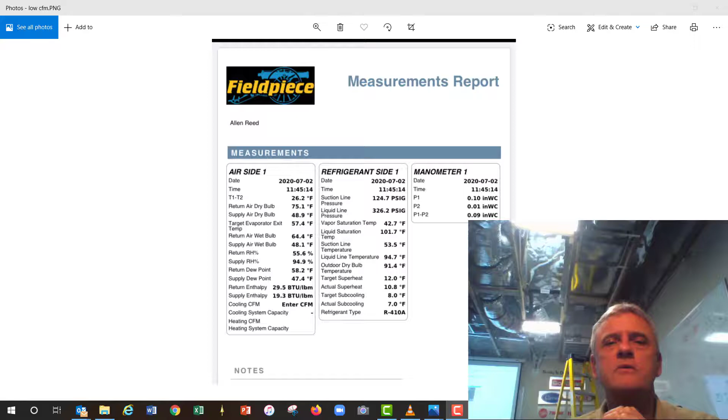Hello. Had a sort of a troubleshooting ponder for y'all.

We regularly talk about the effects of airflow on being able to check superheat and subcooling on a system. And on that theme, came up with a subject for discussion, and that is profiles.

Many of the variable speed systems have ramping profiles for the blowers. I'm going to cover a few of those in just a moment and show you a few pictures of those to see what I mean.

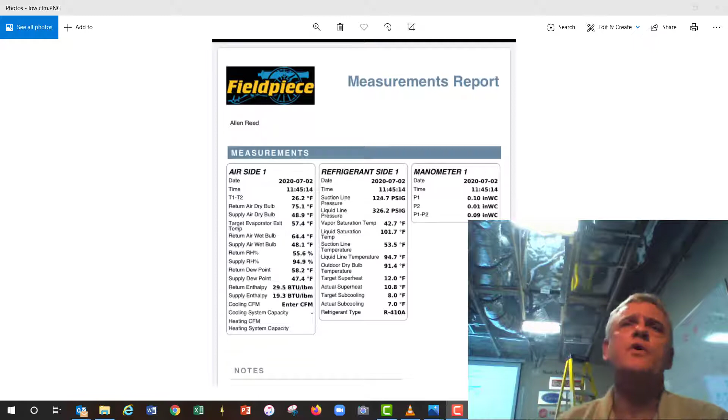But I want you to imagine with me that you came up on a service call and you were seeing readings like these air side readings here on the left hand side.

So let's key in on the dumbed down things, just the basic stuff, okay? This is the target evaporator temperature. I wish they'd just say your supply temperature target, but that's okay. It's saying the air should be coming out at 57 degrees.

And then it says here your actual supply air dry bulb is 48. Do the math, okay? I believe we're going to come up with something like 8 or 9 degrees. The point is not the exact number, but we're 8 or 9 degrees cold. We can agree on that. Colder than we should be.

On the JobLink app, as an example, its threshold for triggering a message about low airflow is 3 degrees. I teach people to pay attention if they see a 2 degree supply temperature difference. In other words, it should be 50, it's coming out at 48, that's a 2 degree cooler temperature.

So it pops up on our radar to look at a couple other readings to see if we're concerned about low airflow. At 2 is what I teach. But 3 is drop dead. There's something wrong. If you're 3 degrees cold, there's something wrong.

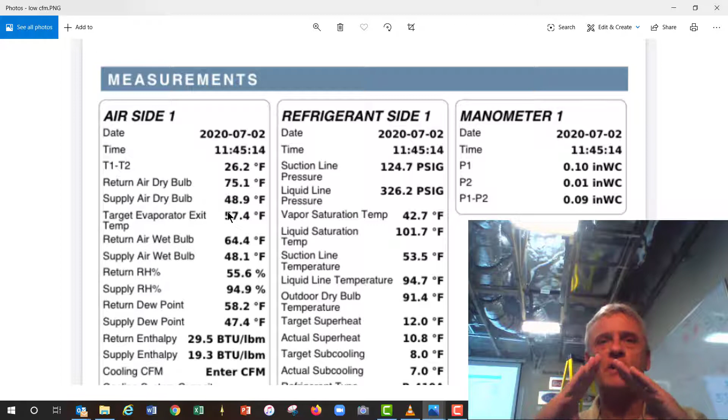You have 3 things. You have enthalpy at the top, and it's made up of sensible heat load and latent heat load. I teach folks to look at the wet bulb and think of the latent with a difference between 10 and 12. That's what they're looking for as a goal on a unit moving 400 CFM per ton.

And then on the other side of things will be enthalpy, and we're going to get to that now, and that is a system that is moving 400 CFM per ton, that is metering properly, in other words, the proper superheat from its TXV at the proper subcooling.

At 400 CFM per ton, enthalpy will be around 6.7 difference in the stabilized house. And we give a range, 6.7 to 7.6. 7.6 generally means you're moving about 350 CFM per ton.

So if we look right here, we can see a difference of 10.2. The max it should be is 7.6. Now, I'm not going to do all the math here and figure it out, but I'm going to guess this is probably somewhere in the neighborhood of about 280 CFM per ton.

Can we agree by looking at what I've just talked about here on the dry bulb versus its target, and the wet bulb difference? Well, my God, it should be 10 to 12. What do we got? 16. Okay, we have much bigger differences, which is indicating that we're not moving enough air.

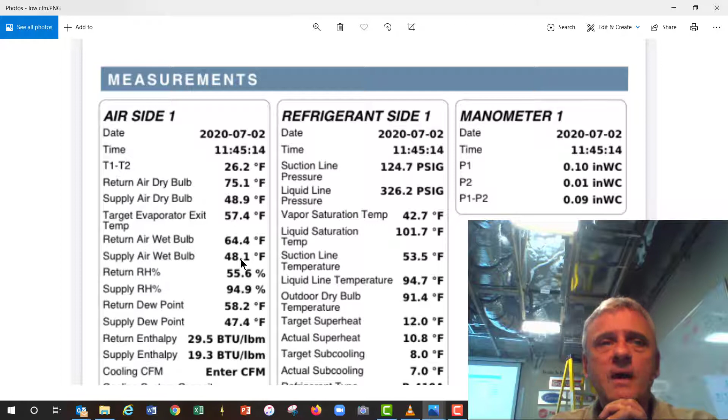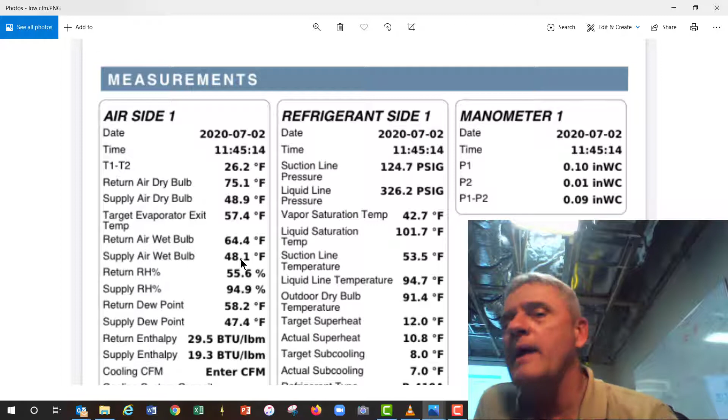Okay, so what does this have to do with the title? The title is ramping, the profiles of your blower, right? The theme, if you will. We're talking about variable speed motors that have a choice to set the blowers up to have a profile where they don't just come on and run at full speed. They may start up at one speed, then for another 7.5 minutes go to another low speed, then finally ramp up to your full 400 to 300, whatever you set it up for, 350 CFM per ton. So I'm going to bring up some pictures here.

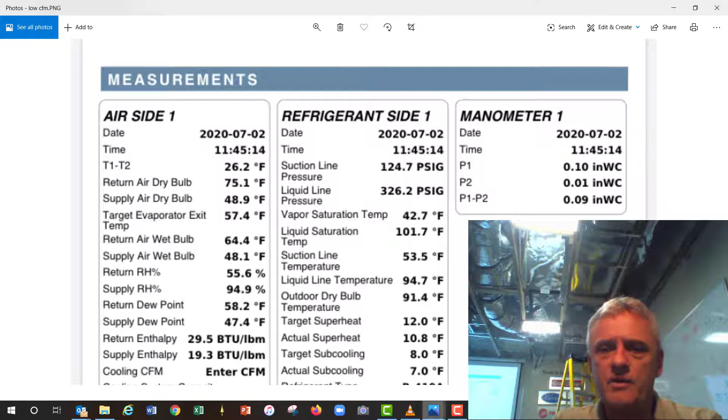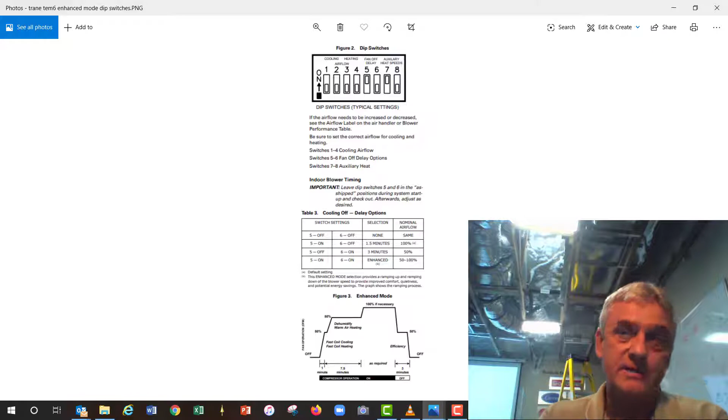I've built the case that we have a unit in front of us that has low airflow, and I want to show you this picture. What you're looking at is out of the installation book for a Trane TEM6. It's not just Trane, we're talking about the theme of ramping profiles. If you come upon a unit and you don't pay attention to those airside readings and you're just looking at superheat and subcooling, you may go down a rabbit hole making decisions on that superheat and subcooling when you should have been paying attention to the air.

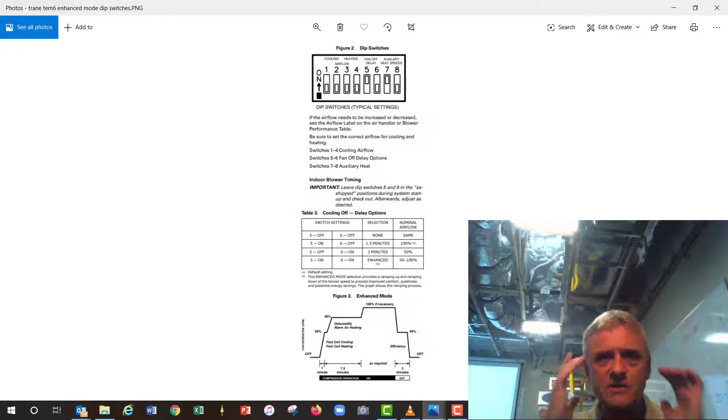So that's number one. Number two, don't respond to low airflow readings without asking yourself, is this a variable speed unit and could it be operating at this moment in one of the reduced CFM sections of its profile? So let's blow this up a little bit.

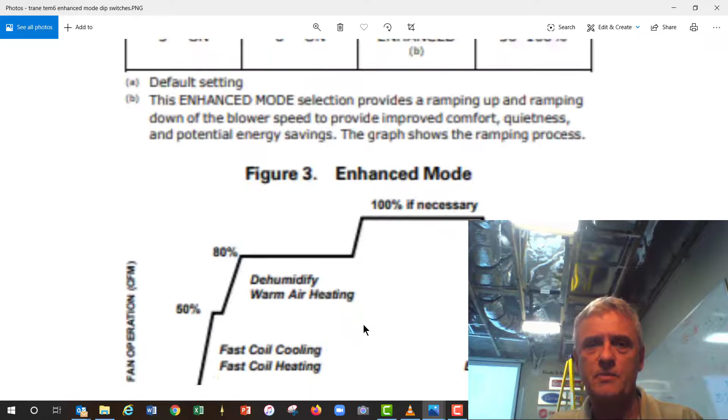What we have here is the enhanced mode. I believe this is for Trane TEM6. So we go in here, and if you follow this line at the bottom, the unit is off, and the moment we see this first line, this is when a call for cooling from the thermostat energizes Y. From here to here, the first 1 minute, follow this line up and over, it's telling you the blower's going to run at 50% speed for 1 minute.

I doubt you're going to just fire it up and run out there in 30 seconds. You shouldn't be, you should be stabilizing the unit. So I doubt this first minute's really going to catch us looking at the unit going, well, 50% airflow, that's going to show low airflow. You're not going to get out there that quick. You shouldn't, but I doubt you're going to get out there that quick, so I'm not even worried about it.

So look at here, from here, come up, come over, and over here and back down. Between these two lines, for the next 7.5 minutes, you're going to run at 80% blower. Most systems in dehumidify mode, just dehumidify mode, lower down 10%, some of them go 15%. But here, 80%, that's 20% less airflow.

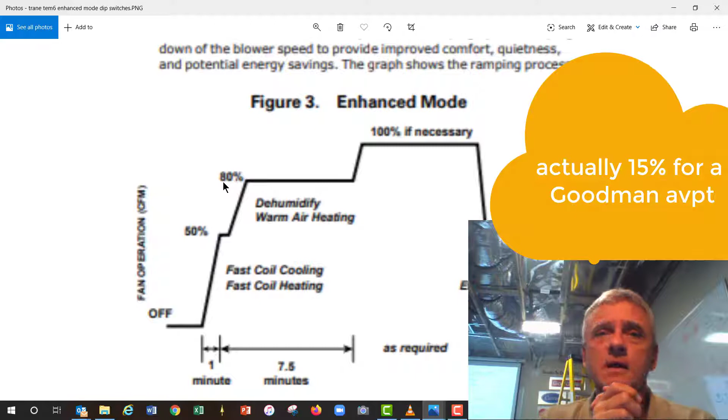It is. My point is, you cannot check your unit out with low airflow, okay? And if you're on a variable speed, you probably need to take a look at its dip switch setting or its jumper pin setting. It means you got to get familiar with it.

And what you would do is go to that unit and either wait for this unit to get through its first minute, then 7.5 more minutes. Maybe you just wait on it. I'm okay with that, give it 10 minutes. You ought to be doing that anyway, right? And then it should be out of its ramping area where it's at a reduced airflow.

Then it's going to ramp up to what? 100%. It's going to go to whatever the full CFM is that it was set for. So from a profile standpoint, you have to wait for that first 8.5 minutes in the case of this one to get yourself up to the airflow it was set for. Two notes I have for you: on this unit, 80% airflow.

That's what it does in this area of the 7.5 minutes. Well, guess what? If your thermostat is calling for dehum, I believe this one might actually drop 20% more. So it's in this first 7.5 minutes, 80%. If the thermostat calls for dehum, it can drop it another 20% off of that 80.

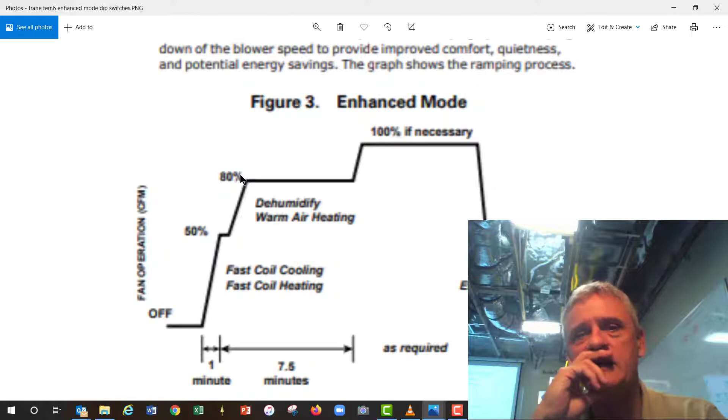Oh my God, let's see, that was 280 CFM minus 20%. You're running about 230, 240 CFM per ton. You're absolutely flirting with freezing the unit up.

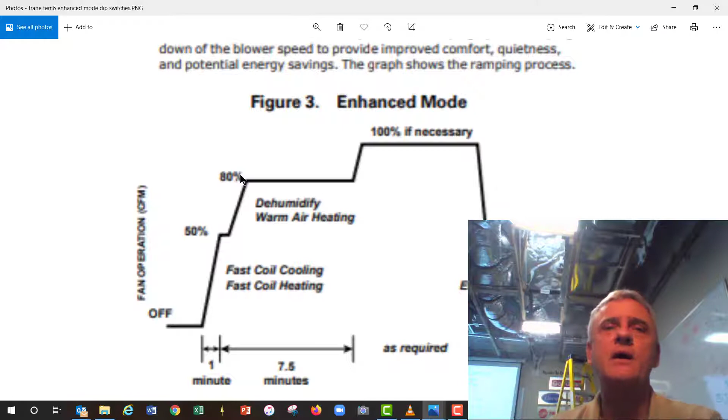In a hot house, maybe not so much, but on cooler fall days, shoulder seasons where it's really not that hot out, if it's cooler inside and you're running the air or you get a dirty air filter, you really are flirting with freezing the unit up is my main point.

So dehum lowers the fan even more than this 80% in this example during the first 7.5 minutes, down to the 100% if necessary. Really, if you know enough about your unit to look at the dip switches real quick and just make sure it's either you wait the 8.5 minutes or you're in a hurry, you could just go up there and defeat this enhanced mode.

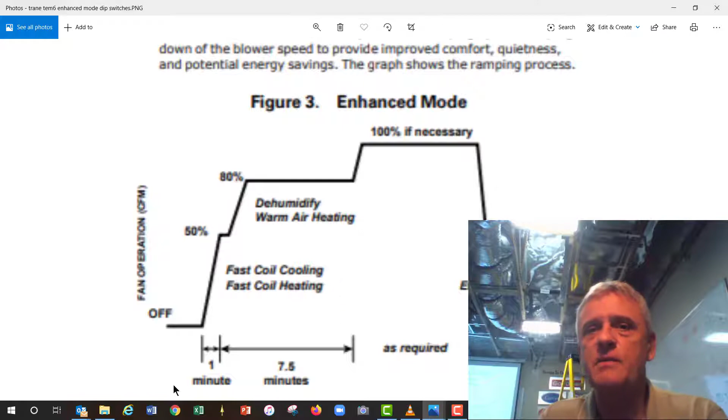You just go in the book and it gives you the settings for your pins. If you look right here, none, okay. Right here, switch 5 and switch 6 are off. Okay, you have no delay taking place. The blower's just going to come on and run at 100%. Okay, all right, so whatever you set the nominal airflow to, that's what you're going to get with it in off and off. You could go in there if you're just too impatient to wait the 8.5 minutes, I guess, and defeat it.

I think we can wait 8.5 minutes, let it stabilize. Just don't make any decisions on it during that first 8.5 minutes.

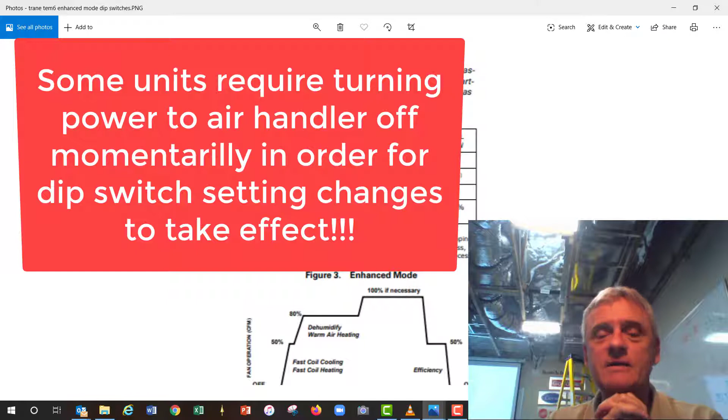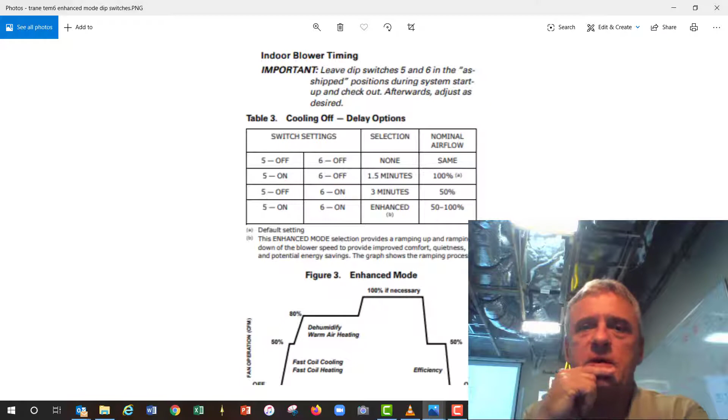So this was a really big problem that I see with technicians that get in a hurry on variable speed units. Oh my God, my superheat's super low. If you don't move enough air, you don't move enough heat. You don't move enough heat, you don't put it in the refrigerant, you don't get superheat. So now you wind up going, man, I ain't got but 4 degree superheat. Possibly, right? And that's overfeeding the TXV.

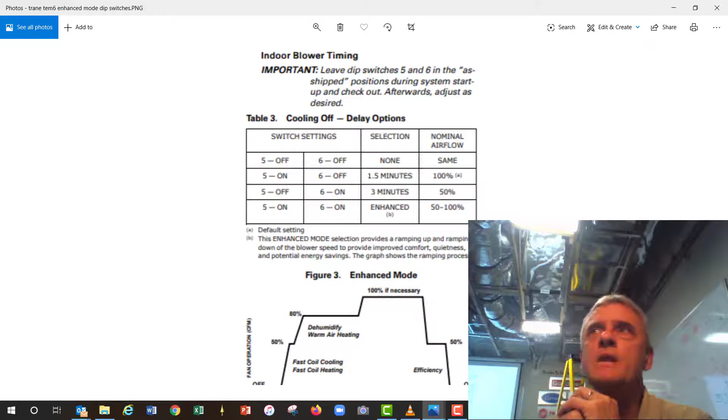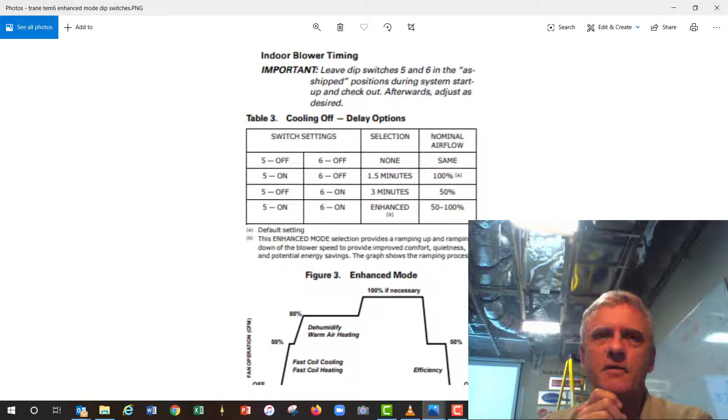You can make all kinds of bad decisions with it. If you don't move enough heat, you don't bring enough heat to the outdoor unit to get an idea of how well the outdoor unit's getting rid of it, the level of charge by way of subcooling, if you're not moving enough air. So ramping profiles, you need to be aware of them, is my biggest point.

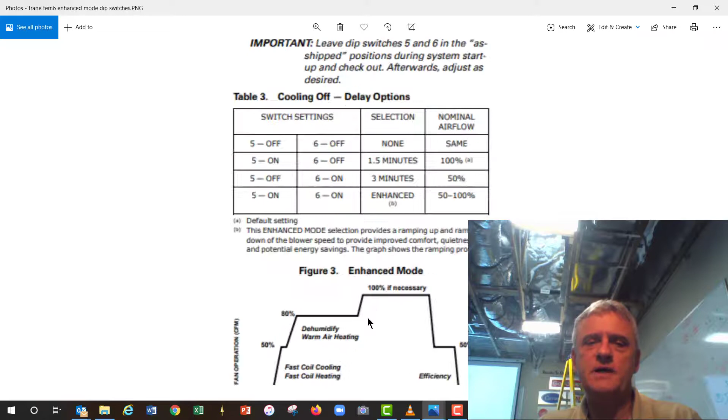On the CFM, I'm going to touch that real quick. That 100% of what? That's the question. 100% of what? What Bubba and Skeeter set that air handler up before? I cannot tell you how many times I've gone to an air handler and the blower had never been set up to begin with. And you have no idea what it was going to do when you get there.

If you don't check it, it only takes a second to get the app out, open it, go to Google Guide, open up the install instructions for a TEM6, and take a look at the dip switch settings.

It's too easy. All right, to wrap it up, don't react to the charge on a unit without looking first at the primary performance indicators: my supply dry temperature versus my exiting evaporator temperature target, check them, no more than 3 degrees colder. My wet bulb, 10 to 12. My enthalpy, 6.7 to 7.6.

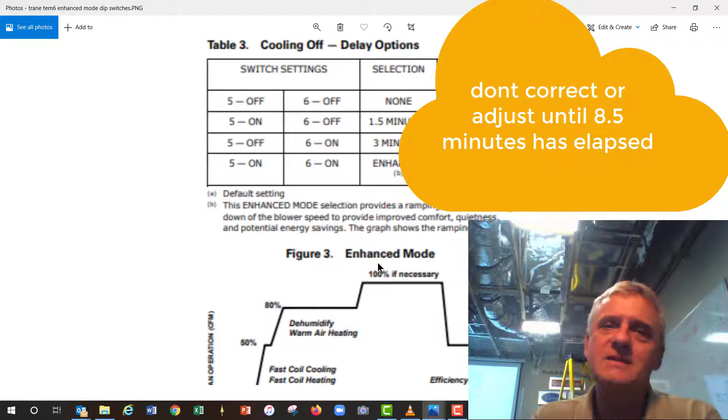Check it first. If they are low, don't waste your time on subcooling and superheat. Correct the airflow. Don't rush. Understand if you got a profile, if you go there and click, let me go get my gauges on, and you don't give this thing time to get through its profile, 8.5 minutes in the case of this one, you're going to go down rabbit holes with your brain that you shouldn't waste no energy on.

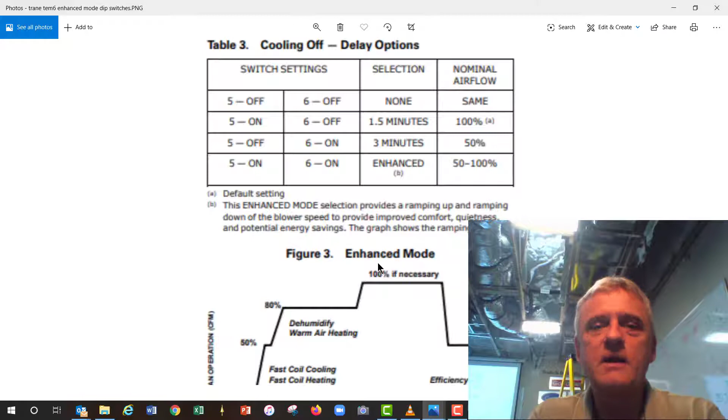The one that probably bugs people the most is this one. Damn, this is confusing to people. And it shouldn't be once you've had someone show you. Someone will show you. See right here, profiles. This is a Goodman variable speed AVPTC, or it doesn't have to be C, which is communicated, just AVPT.

And here it's saying profiles, okay? And look up top. Let's see, do we see profiles? That's cooling speed, that's my adjustment. Oh, profile, 5 and 6. It's telling you, based on where it's set, what the profile is. So if you walk up to a unit and you go, let's see, 5 is off, 6 is off. Let's come down here and look for that.

Let's see, off, go to the left. Oh, that's speed tap A. Okay, what is A? Here's A.

It's not going to have a pre-run or a short run. It's just going to turn on. In the last 60 seconds after the thermostat gets satisfied, it's going to run the blower. I wish that wasn't there at all, honestly, because when you run the blower after a call for cooling, you re-evaporate some of that moisture and put it back in the house, but you're just going to have to live with it. Where we see a problem, profiles, the theme of this video, is when it's set up on D.

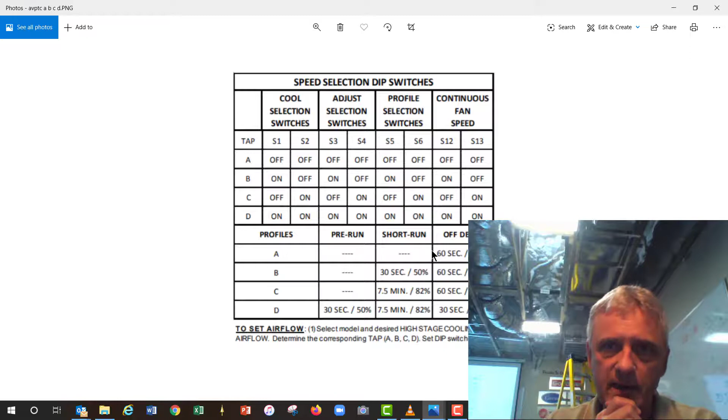with low airflow during the 7.5 minute period, that air handler, if it is in an attic, unconditioned space, out in the garage, unconditioned space, can sweat like a pig. Just saying, it doesn't always do it. If the homeowner likes it 80 degrees, they probably ain't going to run that unit long enough to get it that cold. But if you got somebody like 72, 74 as an example, colder temperatures mean longer run times, and that little bit of insulation inside those cabinets during the short run section, right here, 7.5 minutes, can cause water to pool up on these.

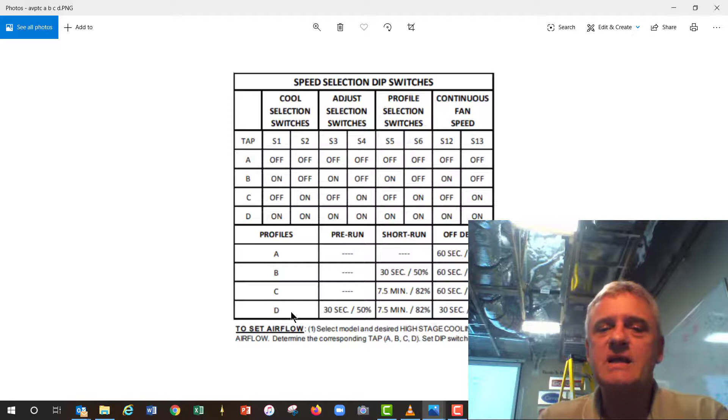So I try to stay away from the ramping profiles if that air handler is exterior, unless a service tech has made the decision because the customer's complaining about humidity issues in the house, for example.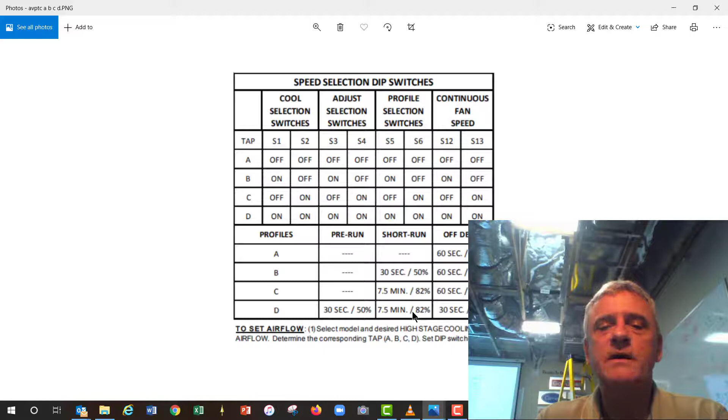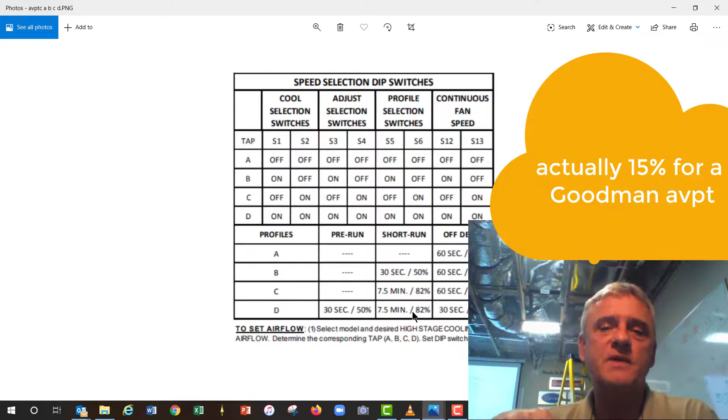This 82% in the case of the Amana and Goodman gets reduced an additional 20%. I believe that's what he told me, was 20%. Hell, I got the message right here - 15%. Goodman drops 15%. So I'm not going to do all the math right now, but damn, that's some low airflow and all the challenges that come from it.

So profiles, checking and charging while it's in the slow mode, low airflow mode, is a rabbit hole you should avoid.

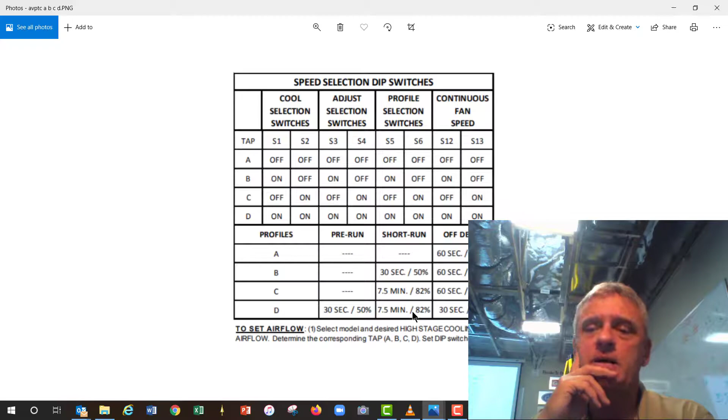Had one other thought real quick. Units that are in dehum while you have your gauges on - that unit's dropping 10, 15, 20% because it happens to be in dehum while you're gauging up on it. It can have an effect on the superheat for sure, subcooling to some extent.

And the point is, if you've got a variable speed unit or even an X13 type system that's been wired up to give some dehumidification, you must make sure to defeat the dehumidification. Whether it's going into a thermostat and turning dehum completely off, that's the simplest thing you could do actually.

Then check the system out. Make sure when you check a system out that it does not have dehumidification enabled.

Or crank the humidity level, 50, 55 is where it might be. Crank it up to 65, 70 or whatever, nice and high so as to prevent dehumidification, lower CFM, while you're trying to get your readings and evaluate the performance of the air side and of the refrigerant.

You can go, man, it's low airflow. Yeah, it might be in dehum. Go to a system, if you see humidity reading out on the thermostat, you better go into the settings and either defeat it, turn it off while you're checking it out, or raise the humidity real high so that it gets rid of it.